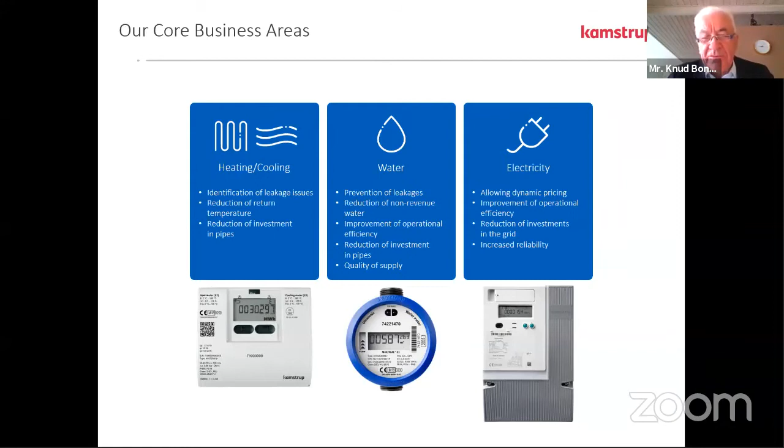We are doing these solutions in a number of core business areas. As you see, water is in the middle here. Water is certainly a very important area for us, but also electricity and cooling/air conditioning, and heating—not so relevant in Southeast Asia, but in other parts of the world. So we do those four types, and we do our metering solutions on all four types of consumption. Below you see some pictures of our electronic meters, all of which are really state-of-the-art technology.

Here's a brief impression of where we are active. Altogether, our solutions are sold and marketed in around 80 countries, out of which we have our own offices in more than 20 countries, among others in Kuala Lumpur, as mentioned, and also in the Asia Pacific, in China and India. All the green dots represent our distribution partners, spread out in around 60 countries. So this adds up to some 80 countries.

The APAC office was founded last year, and is a sign that we want to be much more present in the Asia Pacific area, and not least in the Southeast Asian area. So we hope that you will appreciate us arriving in the marketplace in a more solid form, so to say.

Our company is based in Denmark, and we are very technology-based, innovation-based. We are around 1,500 colleagues, out of which more than 300 are only focusing on R&D. So we spend some 12 to 13% of our revenue on R&D, which in our term is a very high proportion spent on R&D. But this is for us the best security for the future, to have the right solutions coming into the future.

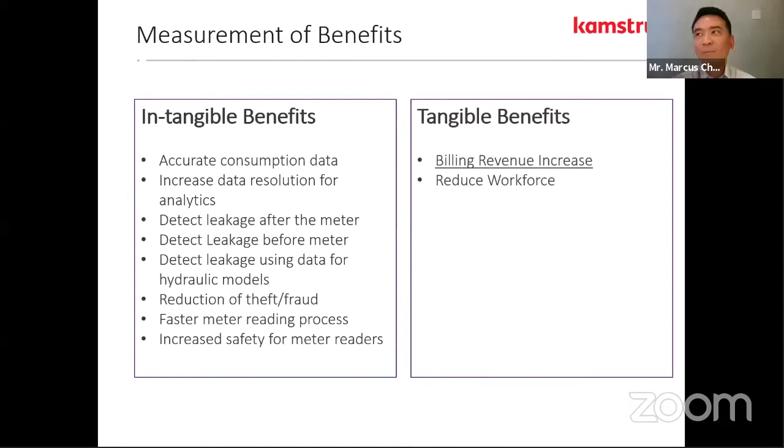Measurement of benefits. So the intangible benefit I mentioned earlier, you heard it. This is what I was intending to show you, the list of all those benefits that we have seen before. And then the tangible benefits - billing revenue increase, reduce of workforce.

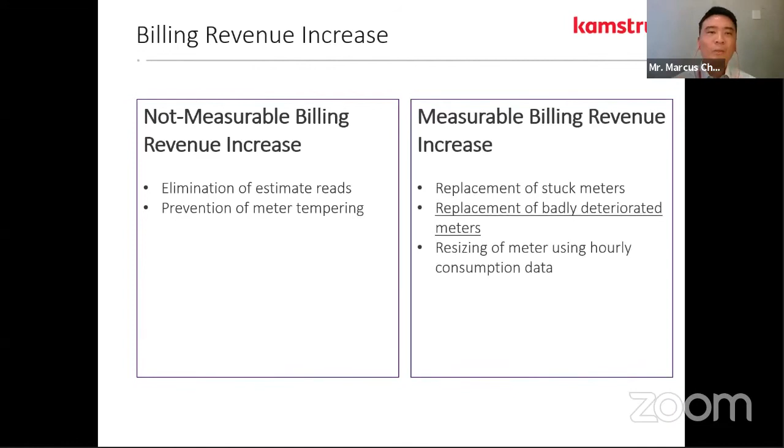So here is where we really want to get your focus on, billing revenue increase. So when we talk about billing revenue increase, we have the non-measurable part, elimination of estimate reads, prevention of meter tampering. And then the measurable part, things that we can actually measure and put on paper.

So if we have a stuck meter, for example, replacement of stuck meter, a meter that has zero bill, we look down the history of your billing records, we can kind of tell how much revenue we expect by replacing that meter. So that's relatively easy to calculate, and it is important to do.

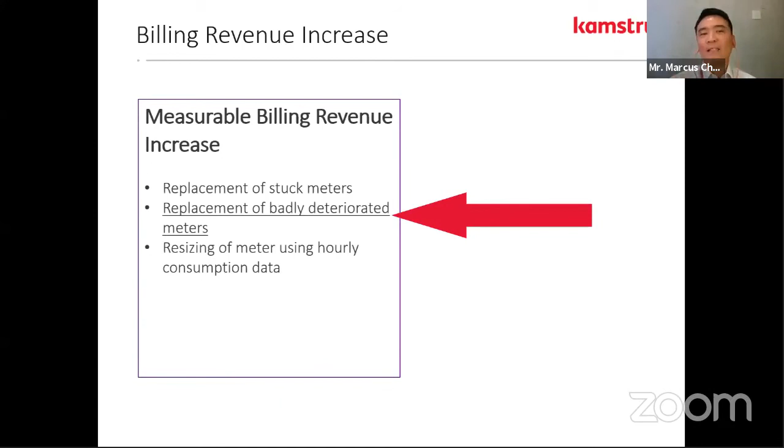But what is more challenging is when do we replace badly deteriorated meters? Because when you go up to a meter and it's running, how do you know how badly deteriorated that meter is? It's running, you turn on the tap, it is running. Then, of course, you have resizing of meters if it's the wrong size. But here, I want to bring your attention on replacement of badly deteriorated meters first, because that kind of answers the rest - replacement of stuck meters and resizing.

So in order to really explore this topic of replacement of badly deteriorated meters, we really need to look at and answer ourselves how meters deteriorate. We need to find that out. And one of the tips we can give you today, before we go out to the field and get some real data from your network, is to look at some research that was done.

So here's a research paper coming from Castellón, Spain. They did a research on aging of single jet meters. It kind of gives you the representation of single jet and multi-jet meters as well.

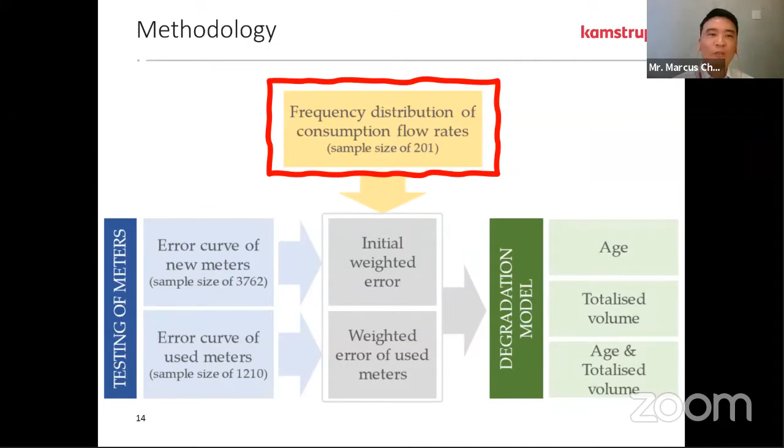In this research, what they have done is this - this is the summary of what they did. They took a sample of 201 consumers, and they went on to sample their distribution flow rates, basically the consumption behavior of these customers. How much water do they consume at high flow? How much water do they consume at low flow? How often do you take showers and how often do you wash a plate or a cup, something like that.

And then they look at new meters. So this particular utility that they explored, they took their new meters and tested them on a test bench - 3,700 units of them - to find out what is the efficiency of those new meters at different flow rates.

And they also took a sample of 1,200 old meters. Literally, they took them out from the field, took them out from consumers, replaced them with a new meter. They took the old meter back and tested it. So they tested various ages of meters and various mileage of meters.

And what they have done is they have come up with a weighted error for both the new and the used meters to come up with a degradation model, which we will look at.

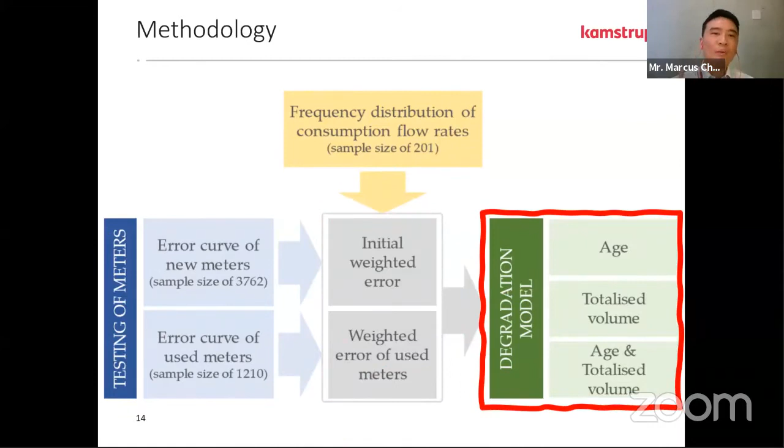It's quite interesting. So before we start, back to the flow distribution - here is the consumer behavior that they found. This is data from their research. I just cleaned up the data and the graph to make it more presentable.

This makes up 100% of the consumer's water consumption. What it is simply telling you is that, for example, 72.7% of the consumption happens at a flow rate of 250 to 1,000 liters per hour. That is where the bulk of their consumption occurs. And then you can see they have some very low flows and some even higher flows.

It could be 2-3 showers happening at the same time, at the very high flows. Now, this is the consumer, all right? It has a big impact on how the meter efficiency works as well, which I will show you afterwards.

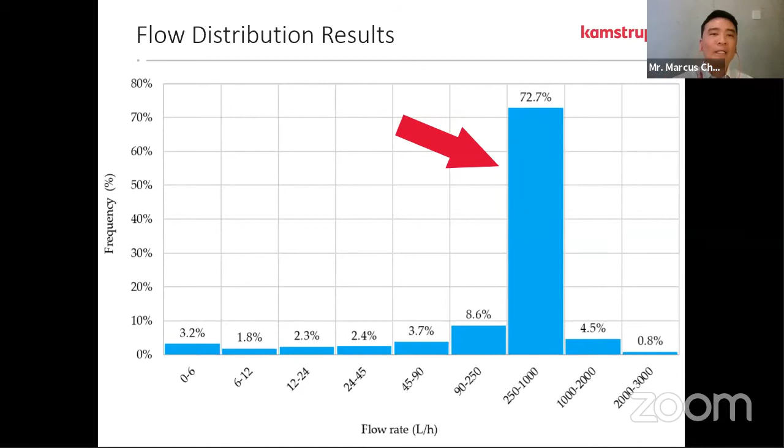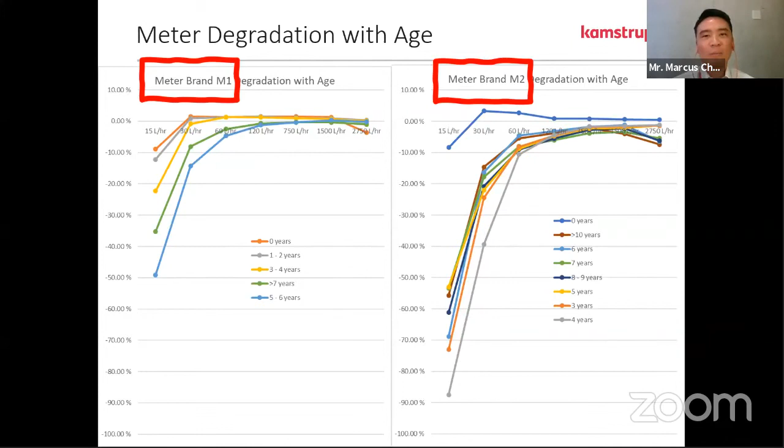So we understand how meters degrade - this is meter degradation with age. You can see that the different colors represent the different ages of the meter. So 0 years is a brand new meter, and the color goes on. If you look at why there are 2 graphs here, it's because the researchers also did a sample on 2 different brands. They simply named them brand M1 and brand M2 - that's all, it doesn't mean anything else.

But before we go further, I really want to get your attention on the first line, the meter at year 0, that blue line up there. This is a brand new meter. So for those who are not experienced in meter curves, maybe I'll do a short explanation. Why does it have that negative at 15 liters per hour, -8, and then it jumps up to positive, let's say 4 or 5% at 30 liters per hour?

Any manufacturer of meters is legally obliged to have their meters fall within plus or minus 5% error between Q1 and Q2 at low flow. So the regulation accepts higher error at lower flow. Then at Q3 and Q4, basically at the higher flow range, Q2 to Q4, the regulation only allows plus minus 2% error. So hence you have a curve that looks like this.

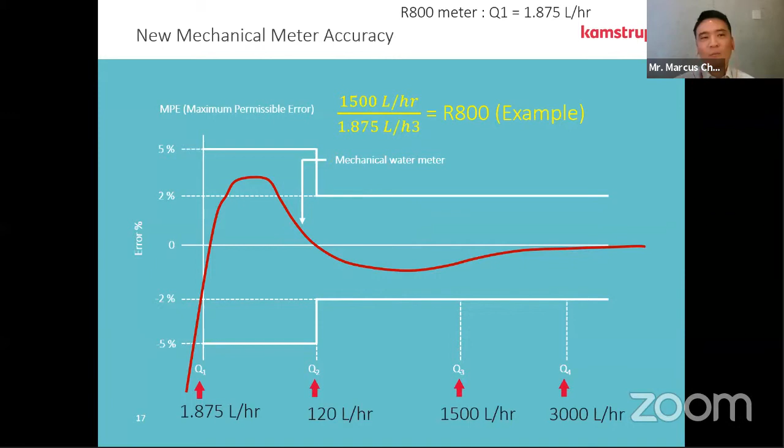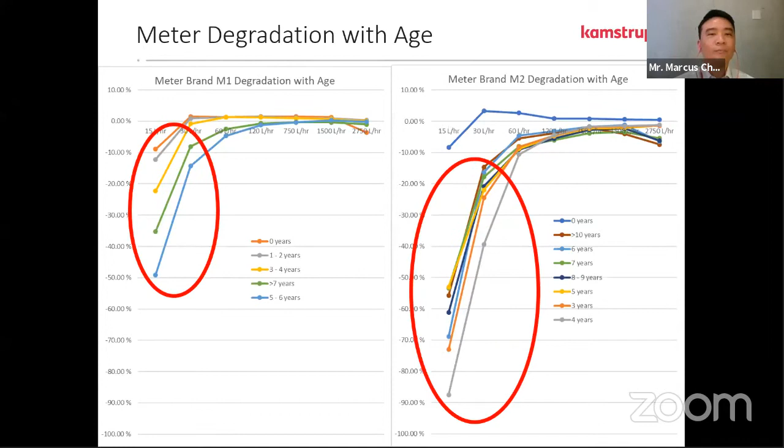That degradation at the low flow hits the low flow harder. So if you took out an old meter and tested it at high flows only, you would have the perception that the meter is working just fine. What you should do is take an old meter and test it at all flows - the low flow, the nominal flow, and also the high flow, the max flow. Then you get a clear picture of what is happening.

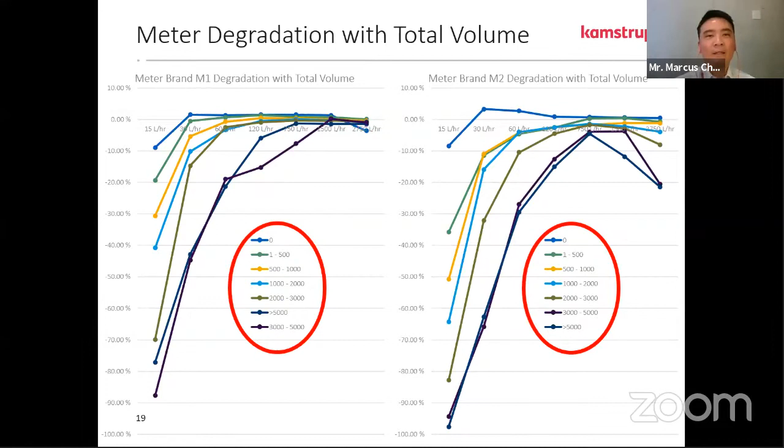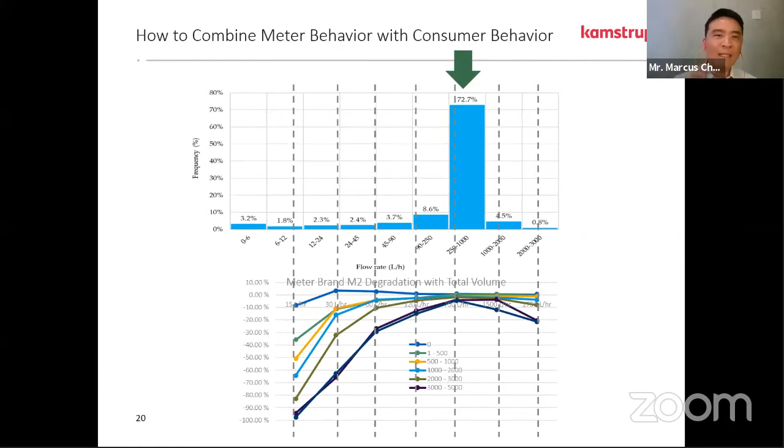So does it mean that they don't need to replace? Not really, because if you combine the consumption chart together with the meter degradation curve, age to age, mileage to mileage, this is what you get.

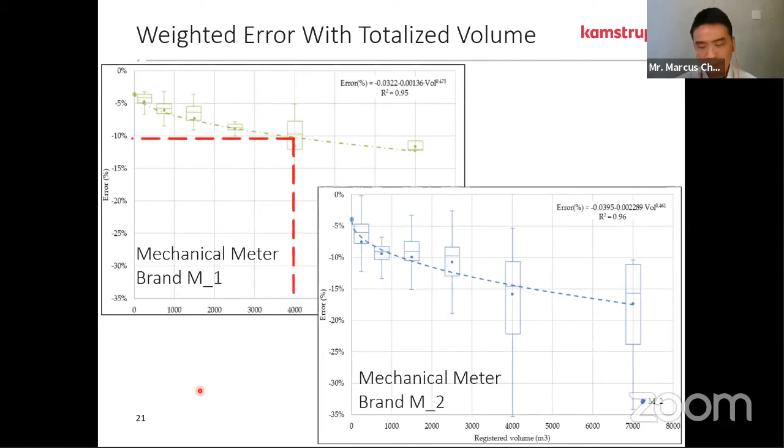So now that we've looked at how meter degrades, the next question is what happens when a meter is replaced? I'll take that example of meter brand M2 from that research, and now I'm putting in my own numbers. These are all assumptions from now on, but valid assumptions, as you'll see. If I install a new meter, I've decided that 4,000 cubic meters is my cutoff point. We need to really sit down and do some financial calculations on why 4,000, but let's assume 4,000 for now.

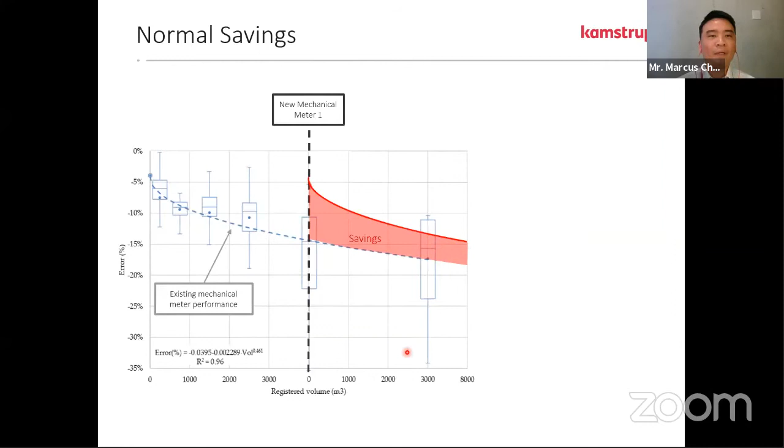What will happen is you renew that curve, and this is how it will look. That point right there will be transferred here, and you'll start the degradation of the mechanical meter all over again. So everything below this curve is your savings. That red colored area right there would be your savings.

So this is how it would look and what savings you'd expect from replacing a degraded meter. First, we need to know which meter has been degraded, to a point where we need to replace it, and then we replace it. We need to calculate what kind of savings we're expected to get from it. And then we also need to do some future budgeting as well—how many times you're going to replace this meter over the next 10 years.

And if it were a smart meter with communication built in and so on, that would simply drive the meter cost up—a smart mechanical meter would drive the cost up and doesn't add much. The savings you see is the same. The tangible savings you see is still the same.

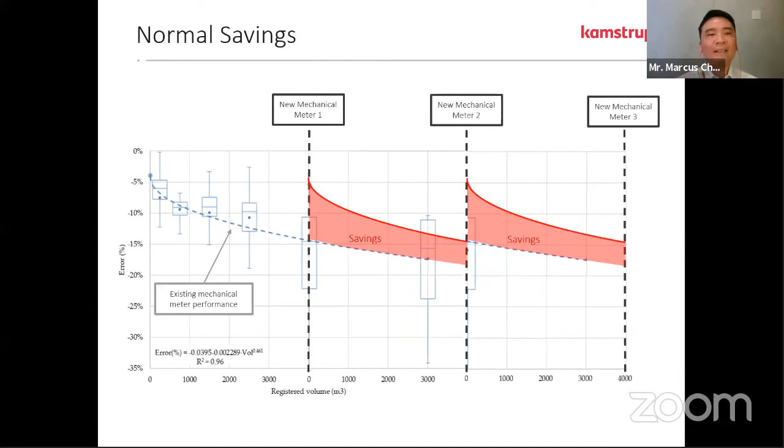So before moving on, this is what I wanted to cover regarding the normal savings you'll see from replacing a mechanical meter with another mechanical meter. Before I go further, my next point is to cover how to enhance these savings. However, I need you to stay seated because I'll be looking at a few more numbers, tables, and graphs to justify the next point.

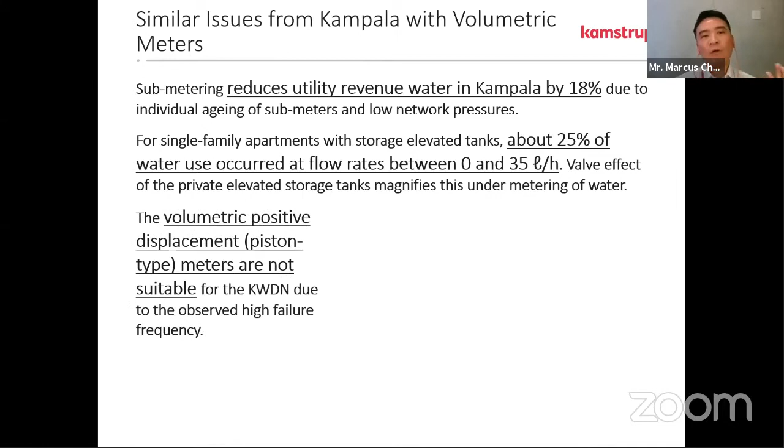The researchers concluded this is due to the valve effect of private elevated storage tanks, which magnifies the under-metering of water. They also concluded that volumetric positive displacement piston-type meters are not suitable for Kampala due to the observed high failure frequency. The data shows most meter failures are due to stuck pistons and gears, piston meters that got stuck due to water quality issues. That's generally what they concluded.

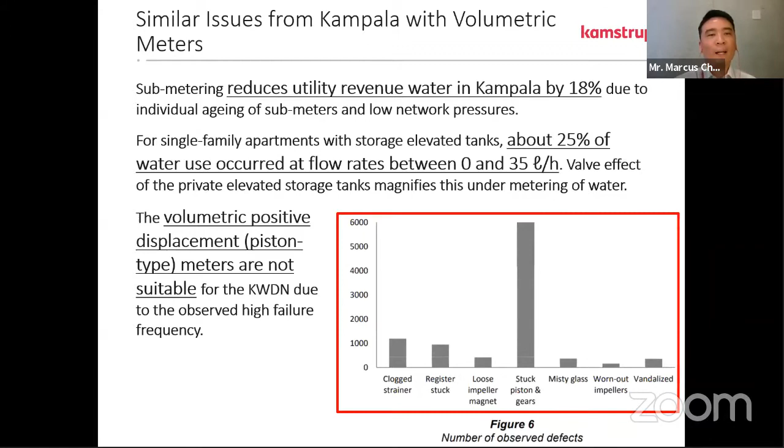Now, coming back, how can we further exploit these savings? If replacing one mechanical meter with another isn't enough to justify a smart meter, how can we do it? How can a smart meter be financially viable? Let's look at how it can possibly be done.

Right now we're looking at 5% savings for each meter replacement throughout its life, for this particular consumer and this particular meter. Now, what if we put in a meter that is non-deteriorating, to achieve two things? First, we want the accuracy of the meter to increase closer to 0%, so I bill almost all the water I sell. Second, I want this non-deteriorating meter to be accurate throughout its lifetime.

Regardless of how many cubic meters have run through it, I want it to be accurate. And from this meter, I also want savings throughout the lifetime of a typical meter, so I don't need two other meter replacements. I put in one meter and see that savings. In this case, if we can achieve that, it's a 15% savings throughout the lifetime of that meter.

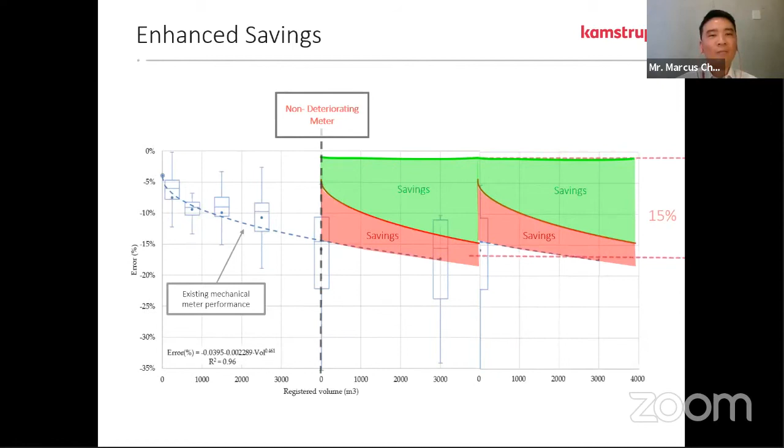So in comparison, we're looking at one non-deteriorating meter with a 15% revenue increase versus three mechanical meters at 5% billing revenue increase each, for this particular customer and meter. We need to do research, and we can assist you in doing that research to find out what that number can be for your application.

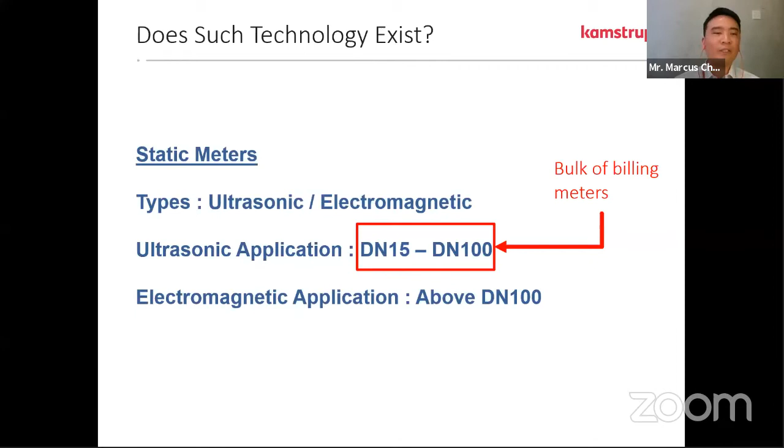So is there such a technology? Does it even exist to achieve that? The answer is yes, there are static meters we can use. Ultrasonic application from DN15 to DN100 covers the bulk of billing meters, and this is where ultrasonic technology is most efficient and economical among static meters. We typically use electromagnetic meters for the larger sizes.

If you look at a graph comparison, as I showed earlier, the red line is a mechanical water meter and the black line is an ultrasonic water meter. The difference is because ultrasonic doesn't require kinetic energy from water to push a turbine to spin it, so it doesn't have that up-and-down curve like a mechanical meter, and it doesn't suffer the same wear and tear.

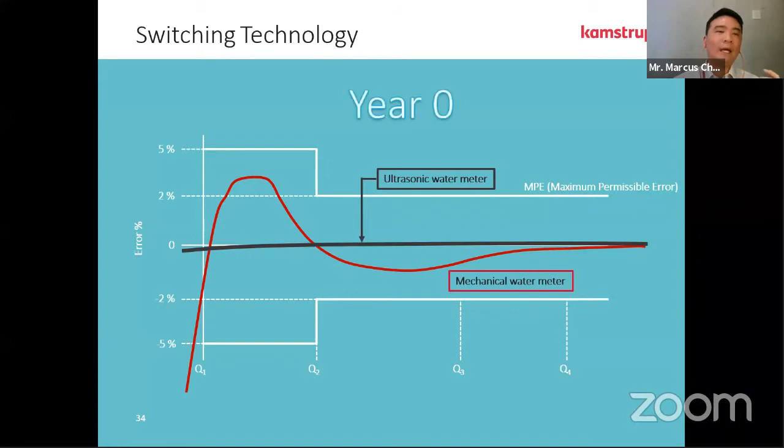You can see at year 0, both are new. At year 2, it looks like this. At year 3, it probably looks something like that. That's the trend I'm describing, not the exact curve, but the general trend. And how do we know the ultrasonic meter stays like that over the years?

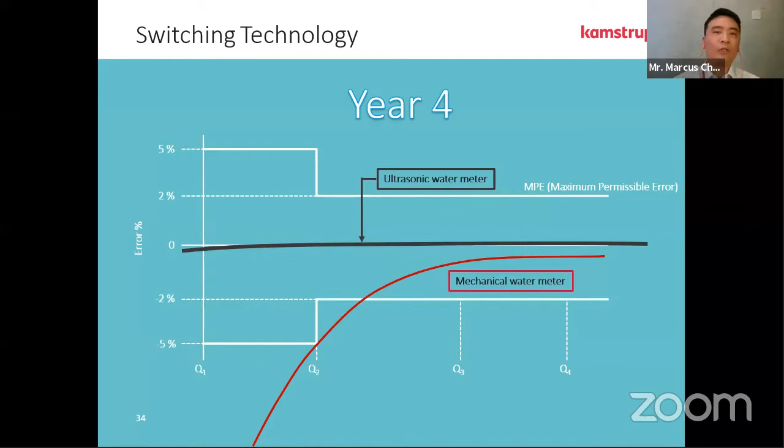First, let's look at how ultrasonic technology works. I'm going to show you a quick video on how it works.

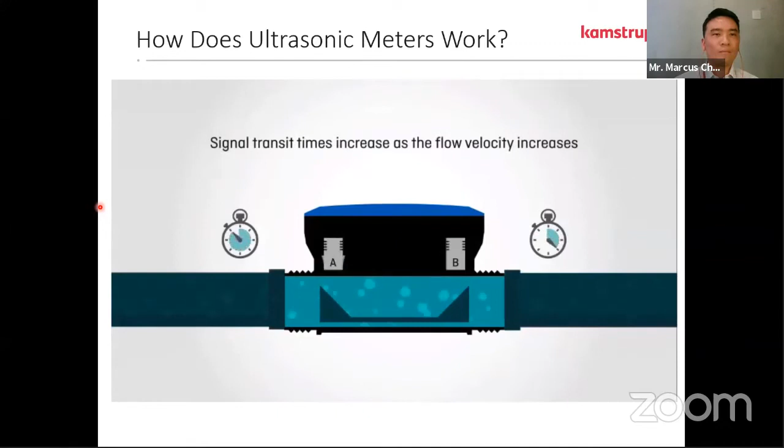So you see, an ultrasonic meter measures water using ultrasound. It measures two ultrasound signals and determines the time difference between them to measure the flow rate.

We know this meter stays accurate over the years because of our own experience. We have millions of installations in Europe, and one of the main requirements there, not in all countries but quite a few, is to have the meters removed from the field, put on an accredited test bench to be tested, and it has to perform whatever R number was determined for it when it was new. So if it's an R50 meter, it needs to pass the R50 test. If it's an R800, then it must pass the R800 test.

So we have our meters, and we have an accredited lab within our factory. In this particular case, we took out 1,308 meters, about 6 to 7 years old. That's around the time where they need to be retested and re-verified.

96% of those meters fall under plus minus 2% error, meaning to say after 6 or 7 years, these ultrasonic meters remain as new. Plus minus 2% error is even beyond the accuracy required for low flow in a mechanical meter. We do above that with the ultrasonic meter.

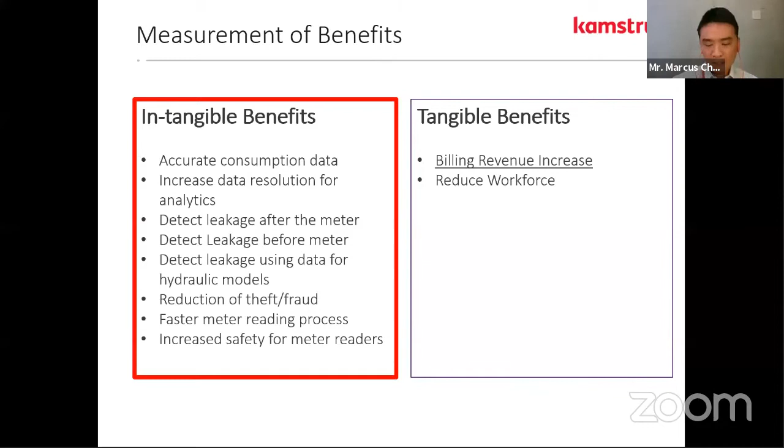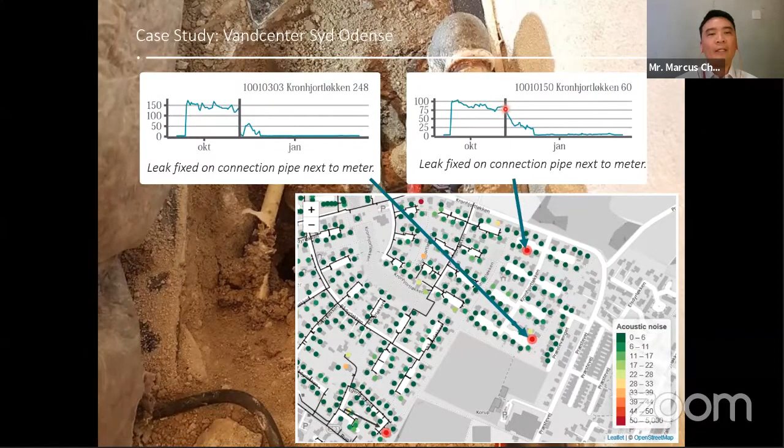And they repaired the leakage and the noise came down. So these are - I can't tell where the leakages are until you install the meter. And at the same time, you can't justify installing the meter until you know how many leakages you can repair. So it's a never-ending chicken or egg question if you go that direction. But now you can harness those benefits.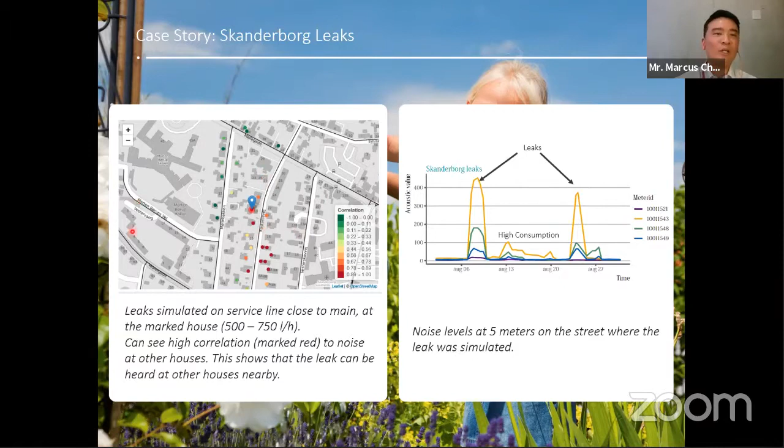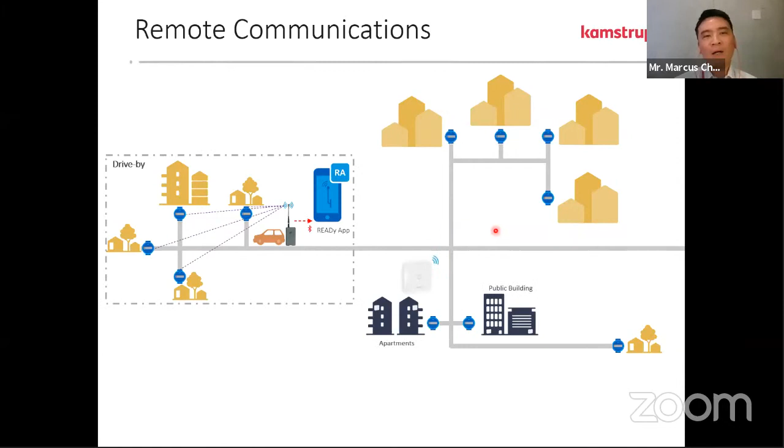Other than that, of course, smart meters come with the ability to be read remotely. So you can do drive-by, walk-by, you can have high-rise AMI communication, you can have a 4G bridge to reach the rural areas, you can have a cell tower to read up to 2,000 meters, up to 2 kilometers in distance. All that now becomes possible.

And when we do all this, definitely we would like to have data analytics done. So to further enhance the value of smart meters, we want to analyze the districts, the different DMA, DMZ. We want to look at the data that is coming from acoustic sound from the meter, for example. And we want to record incidents captured by smart meters.

For example, if a meter is dry, it knows that the meter was dry. Although a tampering error didn't come up, it could indicate that it's dry. We want to find out if the other meters are dry, or if it's just this meter, and we really want to find out what happened at that location. Meter tampering errors, things like that, we can start to analyze.